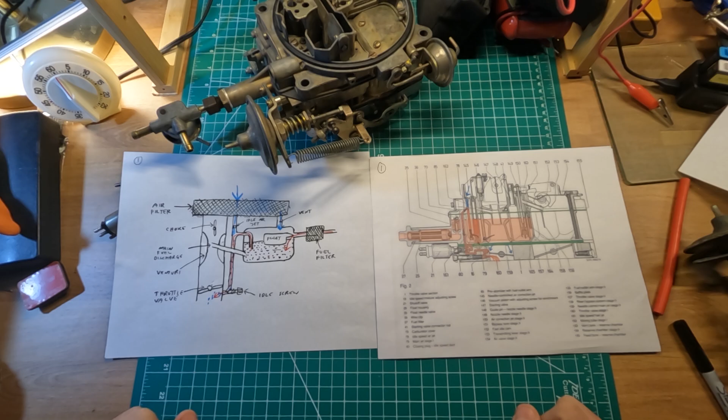Hey, my name is Patrick, and today we're going to talk about how the simplified diagram of the workings of the carburetor relates to an actual diagram of our Solex 4A1 carburetor. We have a Solex 4A1 carburetor right here that we're just going to have as a decoration in the corner of the frame, and we're going to talk about how it usually works.

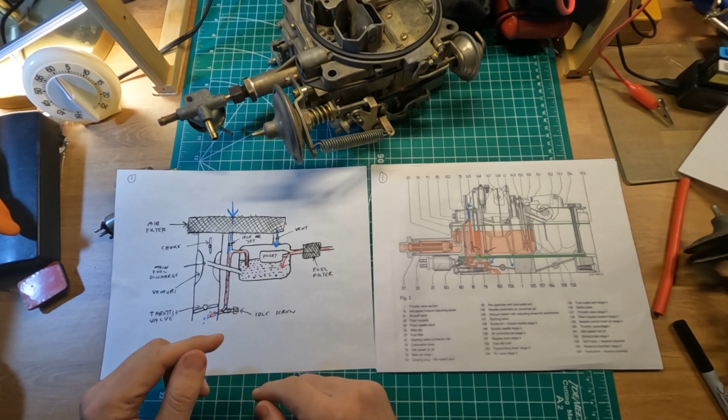So again, your engine is at idle. Now let's talk about how this simplification relates to our reality. So here we have a choke. This is our choke. As you can see right now, it's totally open.

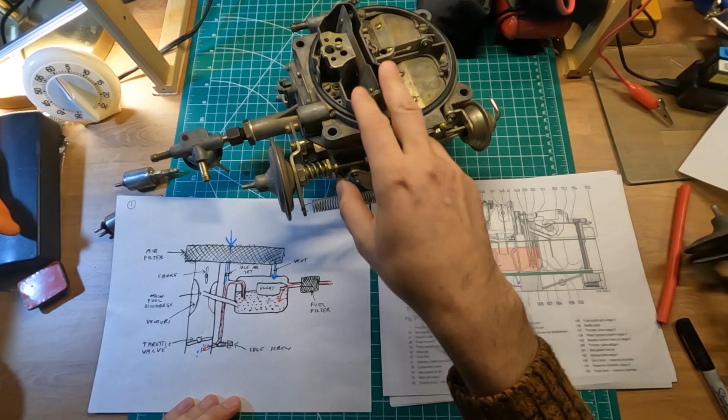That means the air is entering our carburetor through a very important air filter. Now even though the air could enter our carburetor, it cannot exactly, because our throttle plates are still closed as they are right here.

Because of that, there are other passages required that allow the fuel air mixture to enter the engine chamber. So even though the throttle plates are closed, the air still enters, and usually it's through the idle ports.

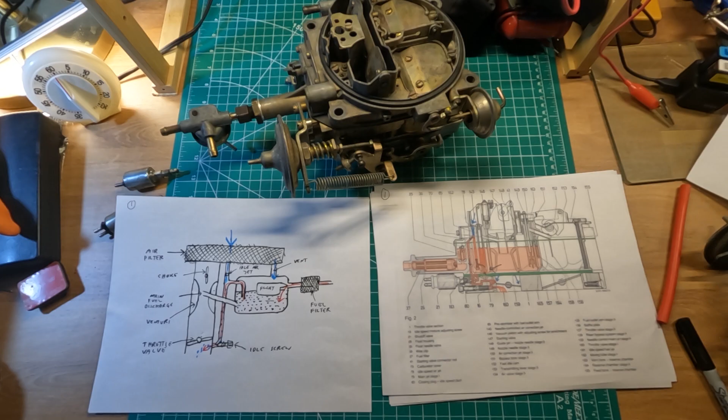So the idle port has a screw of some sort attached to it. Let me just use maybe a simplified version. So this is our carburetor. Right now the throttles are closed. Forget those, those are our secondary throttles, we don't concern ourselves about it.

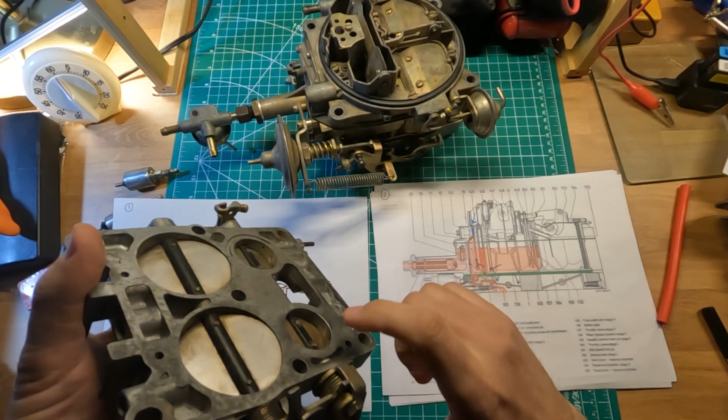Every carburetor, if you cut off this part and only keep the front one, you're going to have a totally viable working carburetor. Many carburetors are simple like this. So now because of that, you have this thing. Those are our idle screw openings.

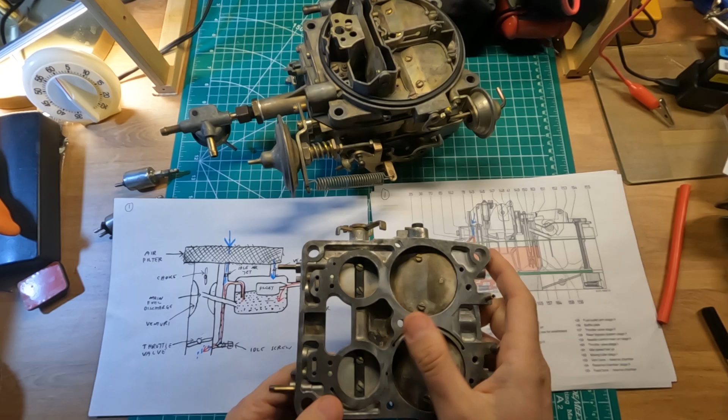Since we have two throttle valves, we have 1 and 2. Simple carburetors have only one. So if we're going to simplify this carb even more, we cut off this part and we cut off this part, and that's our carburetor with one opening. Then you would have the throttle valves right here, and you have an idle screw right here that by moving in and out, increases or decreases the amount of fuel air mixture.

Now remember, it's fuel air mixture, not just fuel. For simplicity sometimes we call it fuel, but in essence it's a mixture of air and fuel that enters the engine, and that's what's combustible. So that will be our procedure.

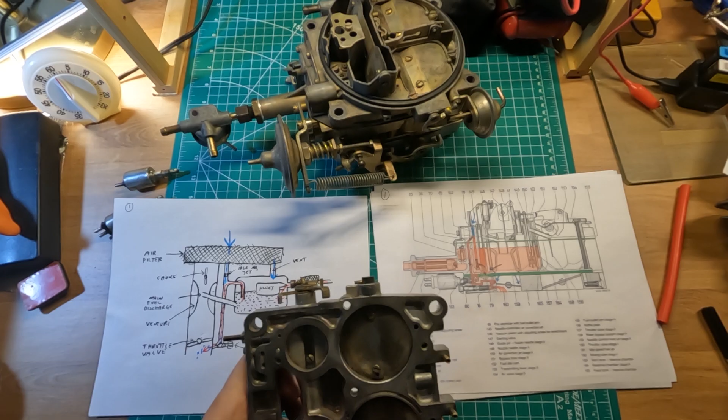Now let's see how that relates. Let's follow the passages. So basically, the raw fuel through a fuel filter enters the fuel bowl. The amount of fuel in the fuel bowl is controlled via a float that can either close or open the entrance opening, and then the fuel gets sucked by going up, and that's a very important quality.

That means it has to be sucked from the fuel bowl. It doesn't go out of the fuel bowl via gravity. It gets sucked because of the vacuum, the suction force of the engine.

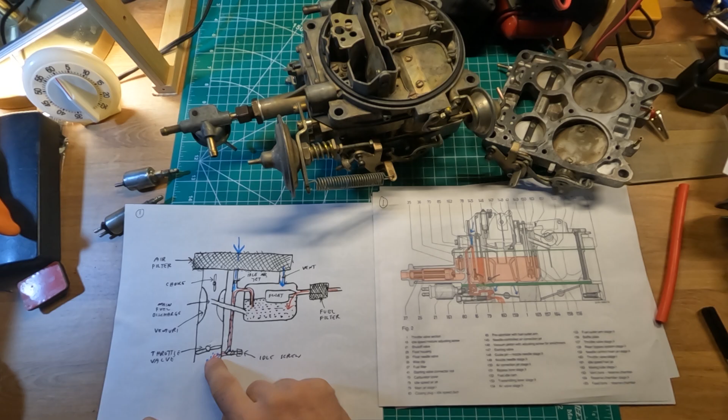It gets sucked, and it gets sucked by the idle jet that controls how much air enters into our idle system, and it gets sucked down the tube past the idle screw and from under the throttle plates. So likewise here, this is our actual workings, this is the actual diagram from the manual.

So the same, this is where the fuel enters here, that's our fuel filter, enters the fuel bowl. This is all that red stuff here. And then if you compare it here, the suction, because it's simplified, the fuel goes up through the tube, and we have the exact same thing happening.

The fuel enters through this jet, goes up, you see, past the level of the fuel. So it's sucked from the fuel bowl. It cannot do it by gravity. It has to be sucked. In other words, suction force, the vacuum force, needs to be present to suck the fuel out of the carburetor, and then it goes past here.

Where do you have it right here? You have the idle air jet. So that's the amount of air that enters the system. So now fuel and air mixes somewhere here, and now it's a fuel air mixture, and then it gets passed.

And then there are some extra passages that obviously the simplified version doesn't have, which is the shut-off valve that shuts off the fuel by kind of restricting the passage. And then you have the idle screw as here, which controls the amount of fuel air mixture at any given moment.

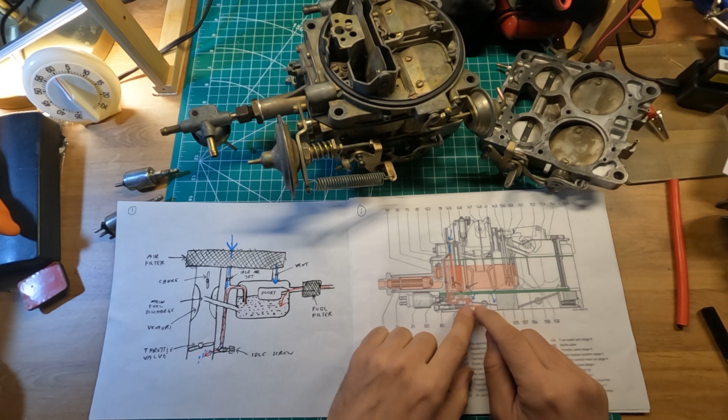And that's basically how your carburetor is working in the idling position. If you notice, there's some extra red stuff right here, which is the transition holes. This simplified version doesn't have the transition holes. Again, this is to explain the function of transition holes. As you notice, the throttle plates right here allow the fuel to be sucked from these bottom holes, but not through the top holes, because there is no vacuum.

As a matter of fact, the small amount of air passing past the throttle valve prevents that fuel from being sucked through. However, when the throttle plates open slightly, this part loses its suction force, it loses its vacuum, and then all of a sudden the top opening experiences some suction, some vacuum, and that allows the engine to transition smoothly from idling to a higher RPM stage. I guess let's go to the second stage.

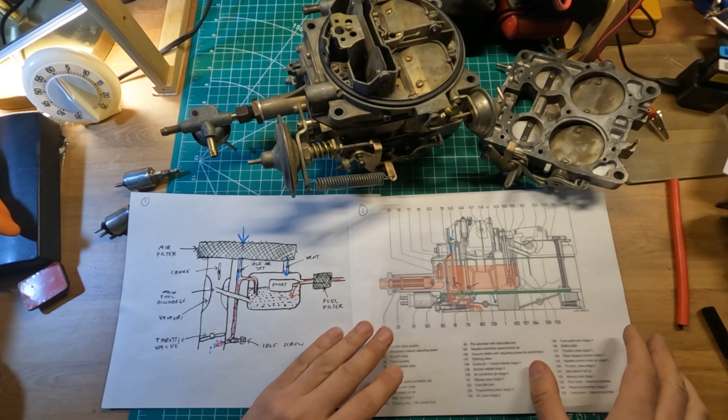Okay, so now we have two scenarios, working at a higher RPM. If you were to pause this video and compare the two, you'd notice all the drawings start making sense. So again, fuel enters our float bowl. Now, because the throttle plates are more open, there is not enough suction force to suck the fuel through the float bowl via the idling passages.

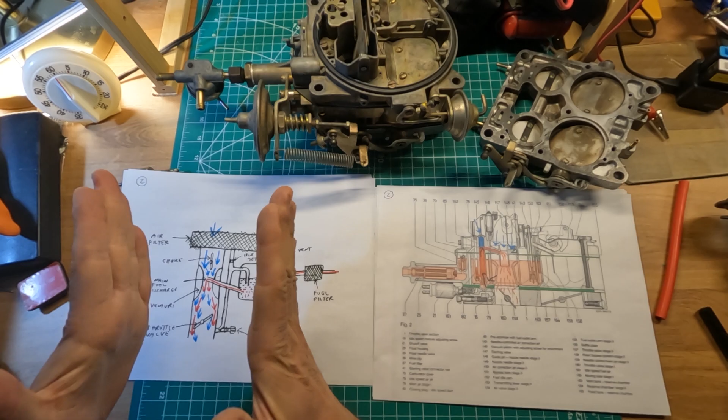Likewise here, there's not enough fuel - see, all of it's empty because there's not enough suction force to suck the fuel out of there. However, something else is happening: namely, you have venturis here that restrict the opening of this passage. And likewise here, venturis that restrict the opening, and with that they create a suction in this area right here.

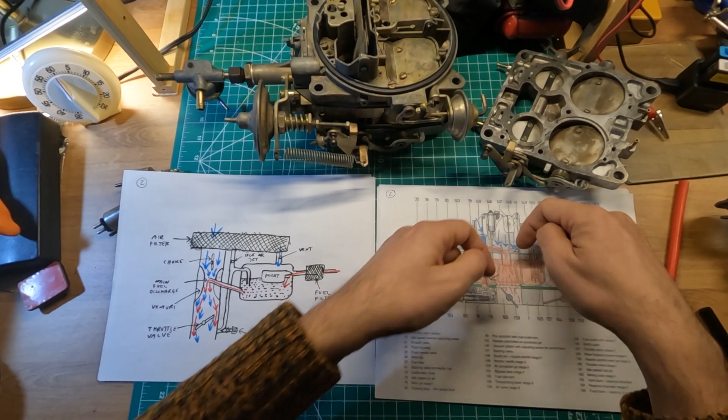And because of that, you have an extra tube. Here you have this tube, and you have this tube, which, by the way, in this drawing should be above the fuel level - that was just a little mistake I made when making this drawing. Likewise here you have this tube, and now the force of the air passing through creates so much suction that the fuel gets sucked up this tube and into the engine. So likewise here, the fuel is being sucked past the venturi and into the engine.

Now once again, notice the blue part, which is the air. The air enters it - there's what's called the air correction jet. That determines how much air gets into the system. Here in the simplified version, we don't have that.

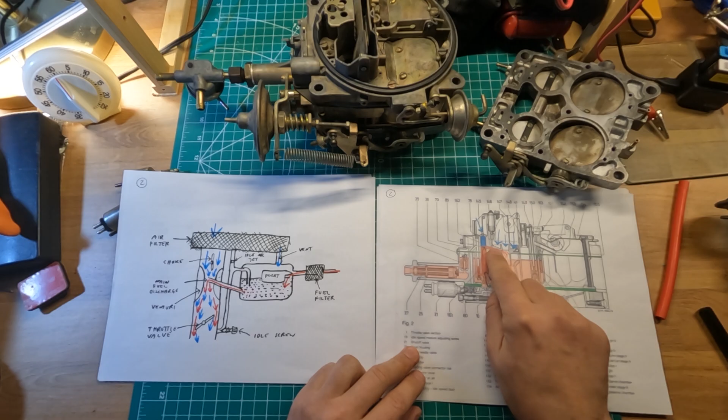But then when the fuel and the air being sucked into the engine mix in this tube, it becomes a mixture of air and fuel - an emulsion. Likewise here, it's just much harder to do, so it's not just a stream of air and fuel, but rather a mist of fuel and air. So all of it's a mixture, and it enters the engine. Likewise here, all of it enters the engine.

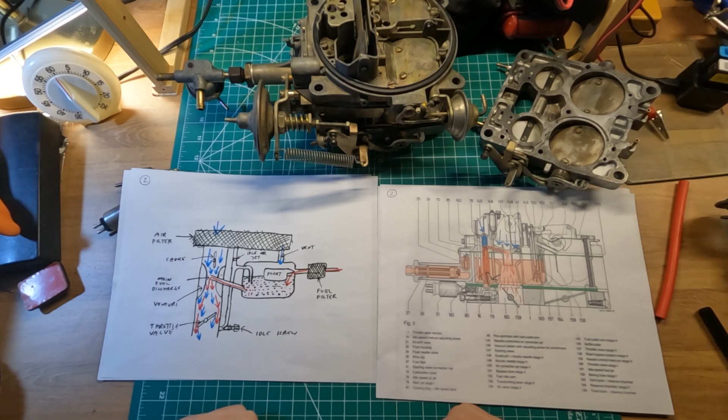And that's how the Solex carburetor works as it compares to a simplified diagram of a carburetor. So the purpose of this video is for you to see that this is not some mystery device. All carburetors might look a bit different on the outside, but in reality every single carburetor operates on this principle, and your Solex 4A1 carburetor operates on it as well. So hopefully all those devices start making sense and become less of a mystery. And that's that.